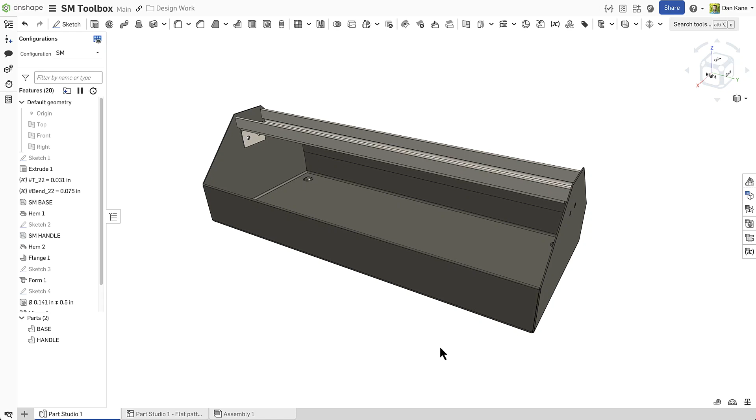This video will provide a step-by-step tutorial for building this sheet metal toolbox within Onshape. We'll cover everything from getting started in Onshape to building your first sketch, all the way through to exporting a flat pattern to be cut for production.

Let's jump right in. The very first part of accessing Onshape is launching a web browser. I personally prefer Google Chrome, but you can use Safari, Firefox, really whatever you want, which means you can run Onshape from any device. So first of all, I'm going to go ahead and launch my web browser here. I'm going to jump over to cad.onshape.com. This is always going to be the best way to go ahead and access Onshape, bookmark it, provide a shortcut. From there, simply enter an email and password, and we're good to go.

We'll start our design by clicking on Create and then creating a brand new document. We'll talk a little bit about documents as we go, but this is essentially your workspace as you're creating your sheet metal toolbox. Go ahead and name it something appropriate and hit Create. We're going to be presented with what should feel like a familiar environment for folks experienced with CAD. If you're not experienced with CAD, that's fine too. But we have our 3 planes and an origin, and we're going to start our design with a 2D sketch.

A few different ways to start a sketch: either go ahead and hit the sketch button in the top left, we can use our shortcut toolbar that's accessed through the S key, or we can use keyboard shortcuts like Shift S. No matter what, we're going to go ahead and create a sketch. We're going to select the front plane, and then we can use the view cube or the N key to go ahead and view normal to this plane. And then we can use the P key to hide the planes and give a clean working environment.

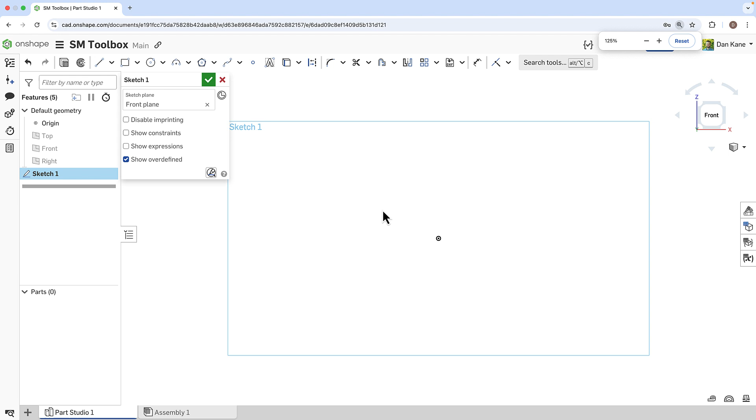We're going to go ahead and provide half of the profile for our toolbox because we're going to take advantage of symmetry and minimize the amount of work we actually have to do. So we're going to start by sketching some lines. So go ahead and access the line command. Let me go ahead and browser zoom a little bit just to make sure that we can see everything as we're working. But we can go ahead and use the line command.

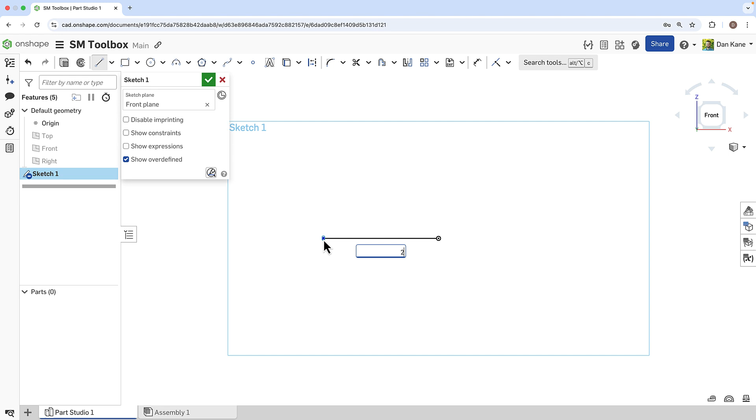And then if we click once on the origin, we're going to be able to drag to select the secondary point. So as we go, if I go ahead and click again, we'll be prompted to enter the dimension of this first line. We're working in inches here. So I'm just going to key in using my keyboard 2.5. And then you'll see I'm still in the line command, so I can keep going. I'm going to snap to vertical here on the second one after I snap to horizontal on the first one. Key in 1.5.

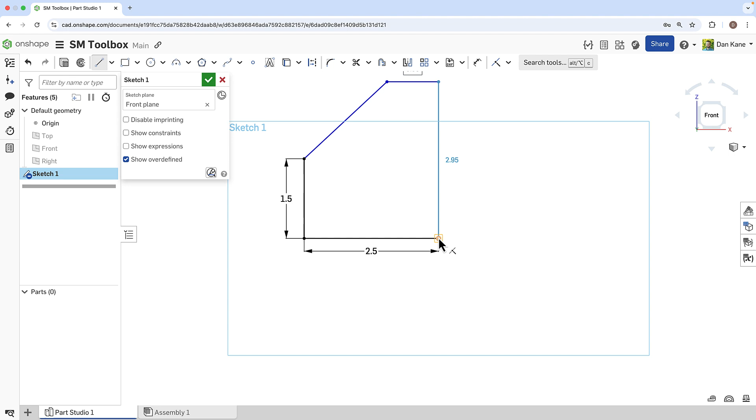We'll then create a diagonal line up and to the right. This one can leave undefined for now, and then we're going to have a horizontal one that actually snaps to just above the origin. Finally, we'll go ahead and drop this down right back to the origin to create this closed profile, and we'll key in one more dimension here. We'll key in 3.5 inches. So we'll see we have a mostly defined sketch, and if I hit Escape, I can actually exit the line command. I could have clicked it again as well.

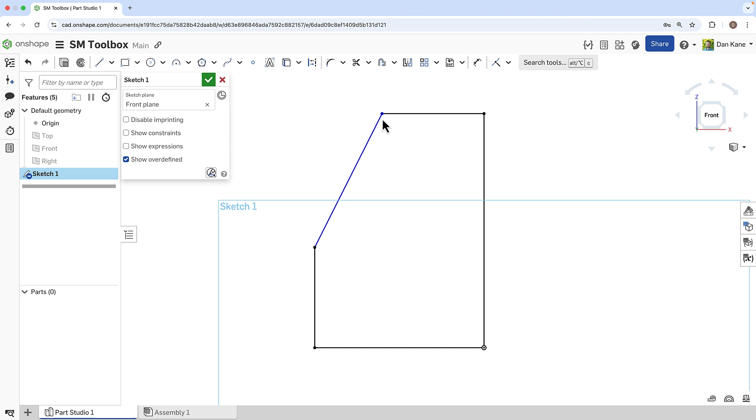But we'll see we have mostly black lines, meaning those are fully defined, with a little bit of blue. The blue means we have an underdefined sketch. We'll see if we actually click on this vertex and drag, this is where the freedom remains. So we're going to go ahead and use our dimension command, or we can use the D key. Click on this vertex here on the top, as well as the vertex on the left. And then we can go ahead and drop this in.

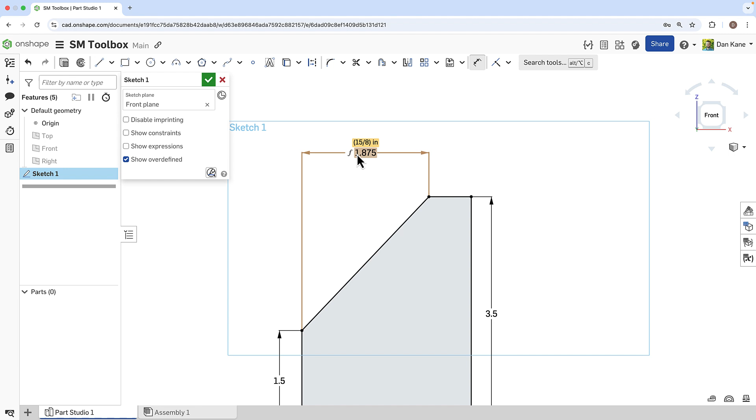We're actually going to have this be a bit of a formula. So we'll key in 15/8. It's going to be 15/8 of an inch. And we'll see that when we drop that one in, this dimension looks a bit different than the others. Right? This one has this F, meaning it's a function. If we hover over, we can actually see what the expression is that defines this dimension. So now we have a fully defined sketch. Great. So if we hit the check mark, we have now created our first feature. We'll see our sketch shows up in our feature tree, and we can go ahead and start to create some 3D geometry.

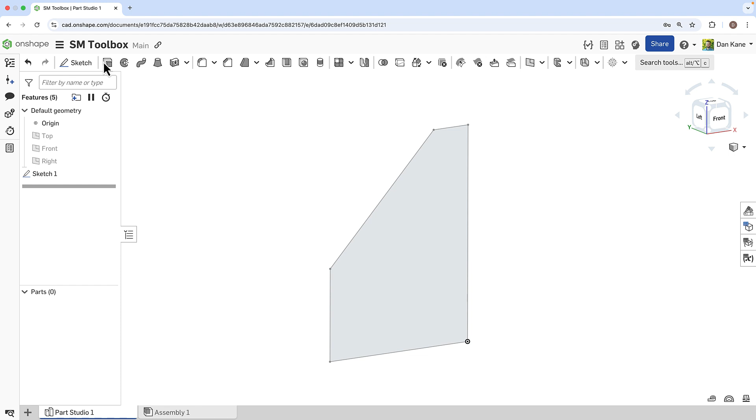So we are going to be working in sheet metal, but you'll find that in Onshape, sometimes the best way to create your sheet metal geometry is by creating a solid part first as the tool to then create the sheet metal. So I'm going to go ahead and use the extrude command. Again, you can use the S key and customize your shortcut toolbar, or utilizing keyboard shortcuts, this will be Shift E. But I'll go ahead and click the actual icon, click on our face, and now we're going to go ahead and key in a depth of 6 inches.

We will again take advantage of symmetry. So we're actually only going to define about half the depth. The total depth of this toolbox is going to be 1 foot, 12 inches, but we'll start with 6 inches and take advantage of symmetry later. So we'll see we now have our second feature. We've extruded this out. We have one part.

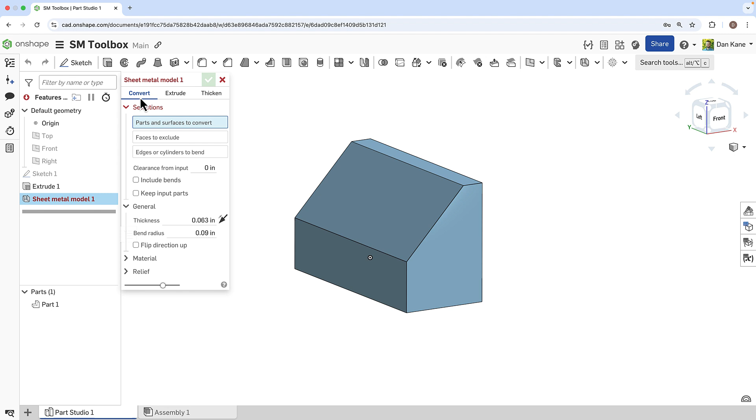And now we're actually going to make some sheet metal. So we're going to go ahead and use the sheet metal command here on the far right of our toolbar. And we're going to use the convert option. This is where when we start with solid geometry, we're then going to convert it over to sheet metal. So if I click on my part, I'll see that every face becomes a separate sheet metal face. In fact, they all become separate parts. We'll touch a little bit on multi-part in just a second, but let's focus on completing this sheet metal command.

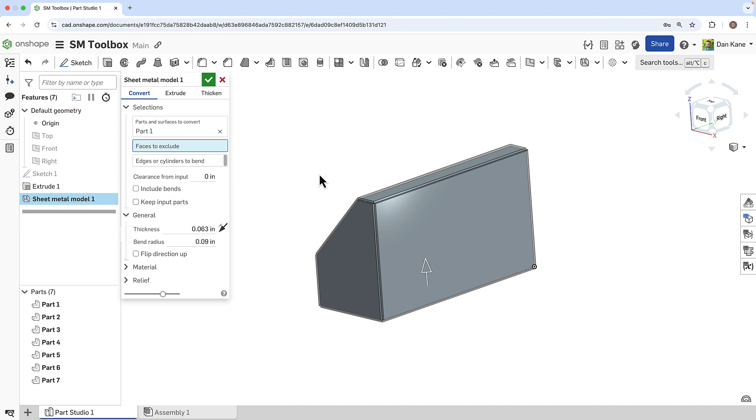Now, we talked about taking advantage of symmetry, so we're actually going to exclude a couple of faces, meaning we don't need them right now. So if I click on this sort of back face as well as the end of my extrude and these two top faces, we now have what is a simpler sheet metal component.

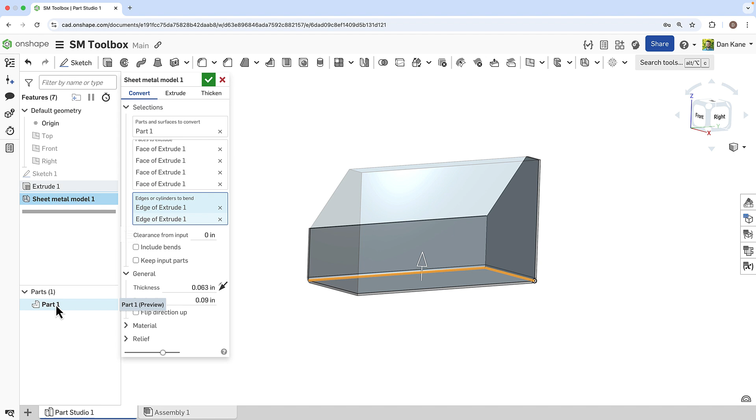And then what I can do is choose where to create my bends. So I will choose these two bottom connecting edges to create my sheet metal bends. And now I can see I actually just have one part because I've excluded some faces and I've connected the remaining faces with these bends along edges. But now we need to go ahead and continue to define the parameters of our sheet metal.

So a few different important things here is the thickness. So thickness and bend radius in sheet metal are often determined by the type of sheet metal you're working with. And there's some predefined best practices, standards around this. So because we're actually going to use a few different sheet metal models here, we're going to define our thickness using a variable. So when I go over the thickness input, if I use the pound symbol, Onshape will prompt me to create a new variable on the fly.

I can go ahead and name this. So what I'm going to do is name it T_22, meaning the thickness of 22 gauge sheet metal. So this is another expression here, and we're going to key in 1/32, and then we'll specify a unit. So we'll say 1/32 inches. That is the thickness of 22 gauge sheet metal. And you can see as soon as I confirm that, we have a new variable feature in our tree just above our sheet metal model that allows us to go ahead and use that on the fly.

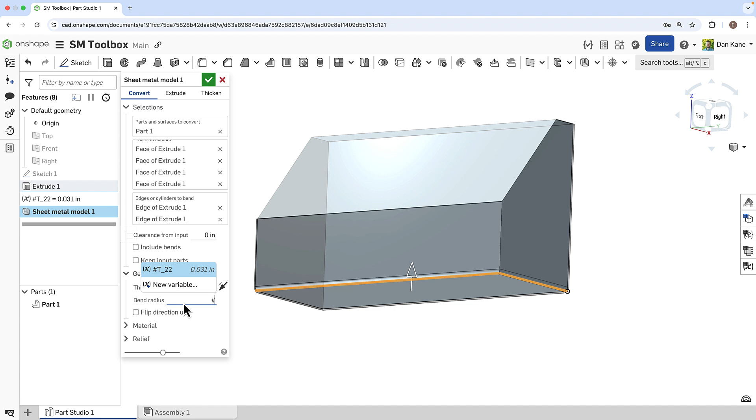Similarly, we'll create a bend_22 new variable. This is 0.075 inches. And now we have these variables that we can reuse later or change along the way and make sure it affects all of the sheet metal within this part studio. Great. So now there's a few other inputs.

We're not going to mess with any of these for this particular design, but Onshape does give you control over K-factor to understand the exact precision of the bend geometry. A couple different ways you can define this with bend allowance and deduction. You can also define your reliefs. These can be corner by corner, but you can also define it on the entire model. In this case, we're going to use a closed corner, but there's a few different options that we can use. And all of this, of course, rolls through to the flat pattern that we'll get to in just a second.

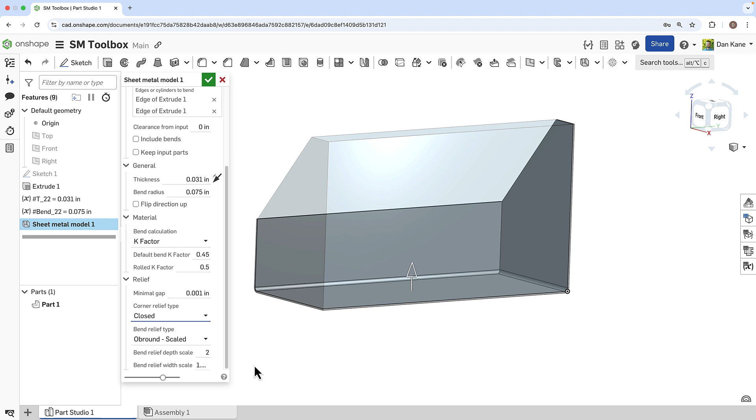So that is the definition of our first sheet metal model. If you go ahead and confirm this, we now have a great starting point to continue to work off of. So this is kind of setting up the overall geometry. And now we want to add just a few different details to this. So what I'm going to do is actually add a hem.

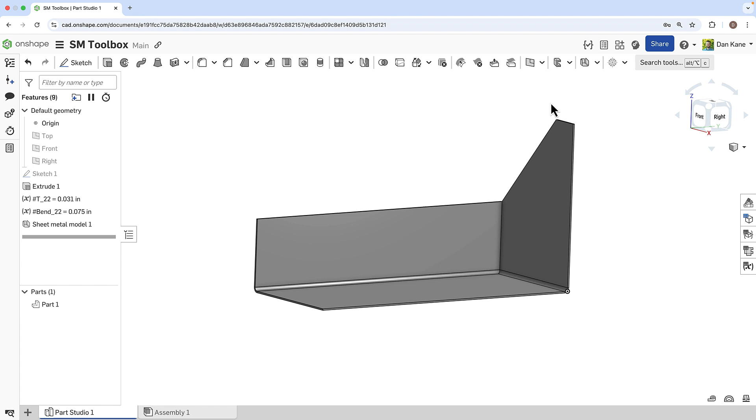So if we hit the drop down of the sheet metal tools, or if we use the search tools, this is a great function to go ahead and find the exact tools that you're looking for. It'll highlight it in the toolbar. We'll give you a quick tool tip. And here we're going to go ahead and select this edge of the side here. So we can go ahead and define this as 1/2 inch, and we'll see our hem get created. We have control over things like rolled hems, teardrop style, but in this case, let's use a straight hem, and we can go ahead and confirm that.

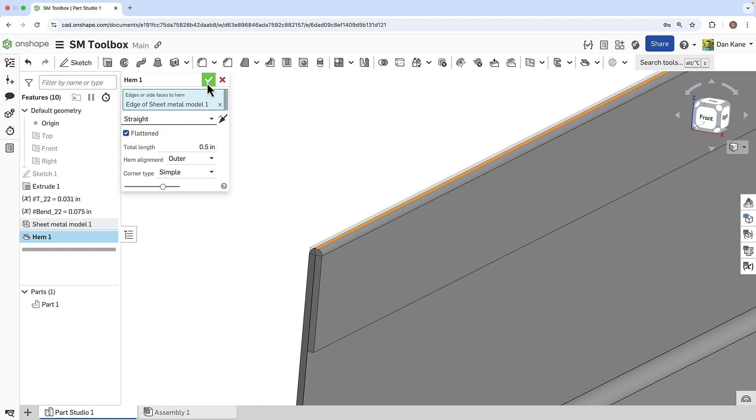Now, the $1 million question I'm sure everybody is asking. What about my flat pattern? In Onshape, there's no flatten and unflatten steps or operations. We are going to be able to do everything in the bent and flattened state simultaneously. The key here is this sheet metal table and flat view flyout on the right-hand side. When we go ahead and click this, we have full insight into the flat pattern while viewing and working on our 3D model. We can go ahead and hover and see the cross highlighting that occurs.

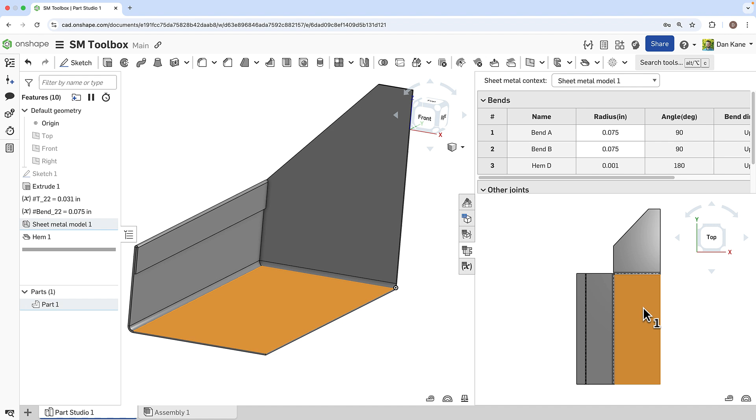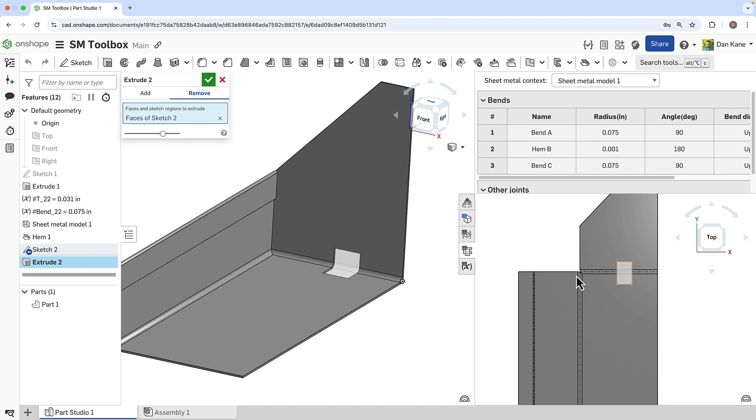We can even sketch on this right-hand side to create parameters that maybe we even cut through a bend. We're going to see all of this in real time. We don't have to flatten and unflatten. We're going to get real-time feedback as to whether or not what we're making in the 3D or flattened space has conflicts in the other one, has manufacturability. All these guardrails and this visibility is going to be available as we're actually designing. Let me go ahead and cancel that. I'm actually going to get rid of my sketch too, just a proof of concept.

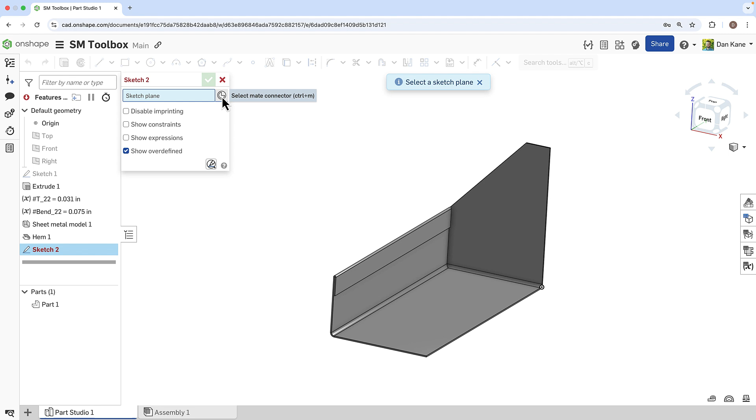Now, the next step is to go ahead and create one more sheet metal component. So what we're going to do is we're going to create another sketch, and we're going to create the handle of our toolbox. So again, sketch, Shift S, we can use our shortcut toolbar, it doesn't matter. But one thing here is instead of picking a plane or a face, which of course we could, we're going to go ahead and use Select Mate Connector as the way to build this sketch. So once I select that, when I hover over the geometry, Onshape Mate Connectors show up at relevant geometric locations.

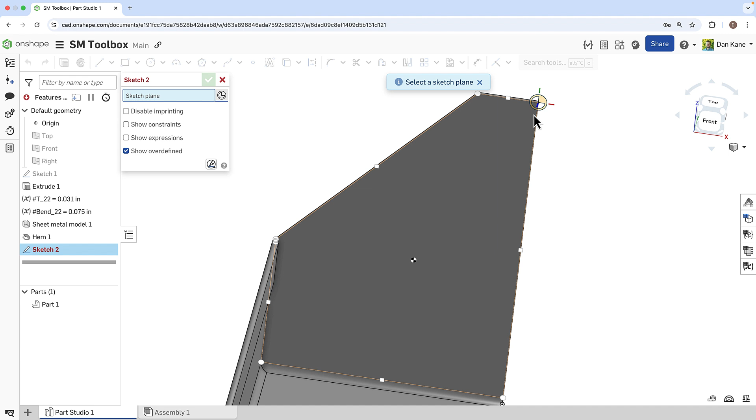There's a lot to Mate Connectors. I highly recommend doing some reading on what we've done here, but this is a Swiss Army knife of a tool in the CAD space. So Mate Connectors are going to be what really drives all of our logic in the assembly and mating space, as the name sort of alludes to, but is a powerful tool in the design environment too, because it provides essentially a mini coordinate system that we have control over. In this case, we're going to use what we call an implicit mate connector, meaning we're using the existing geometry to imply locations to use this. But this is just a great tool to go ahead and use instead of sketching on this face.

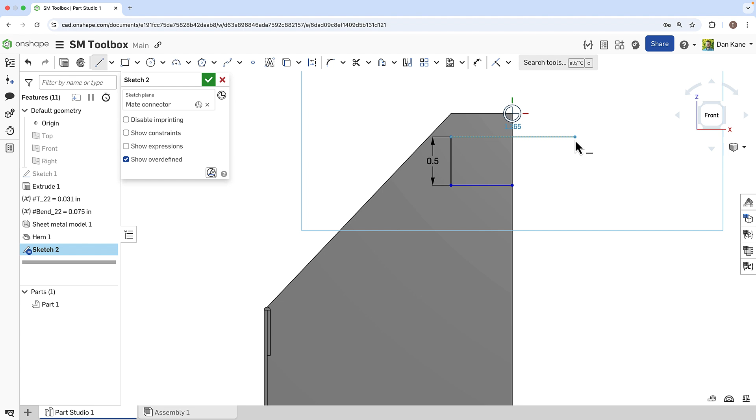I'm going to use my shortcut toolbar using S, and I'm going to go ahead and define just the profile of our handle. So what I can do is go ahead and start on this edge, and then I'm going to snap it horizontal and then vertical to that other vertex. Then go ahead and draw one more line up. I'll key in 1/2 inch. And then it's still blue, right? So I'll escape out of this. I'll use the D key to turn on the dimension command. And I'm going to dimension between these two vertices. We're going to do 1/10 of an inch here, and then our sketch becomes fully defined.

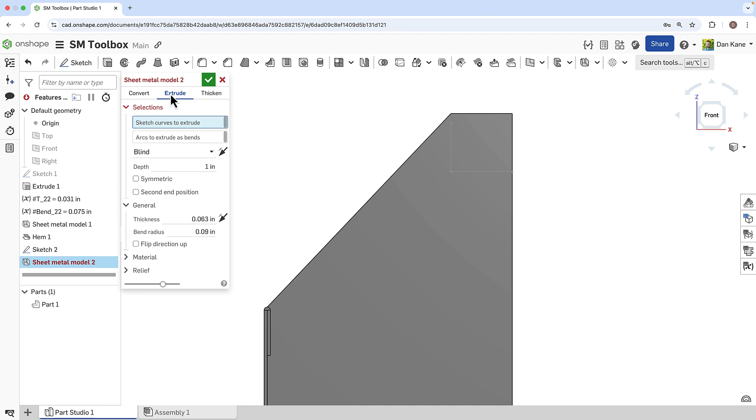Now, we're going to make an additional sheet metal model. But instead, this time of using convert, we're going to use extrude. So there's a few different ways to do this. Convert, we obviously started with a 3D entity. Extrude, we're going to take a 2D profile like I've just created and extrude it out as sheet metal. Thicken is a great option to be able to sketch a 2D profile and then thicken it into sheet metal as a starting point. That may be more familiar for folks who have designed sheet metal in other systems. We provide flexibility, really kind of whatever suits the needs in that moment. In this case, extrude in this profile made the most sense.

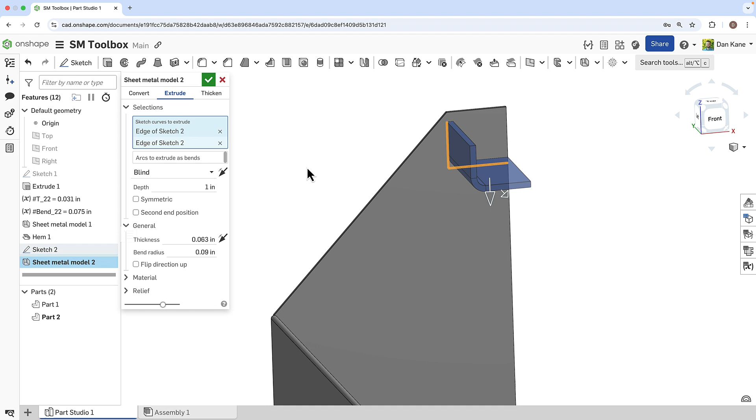We have, of course, parametric controls here. So instead of going blind and defining it, I want to make my model as parametric as possible. So I'm going to go up to face. I'm going to select the end of my existing sheet metal component so that we make sure that this extends up.

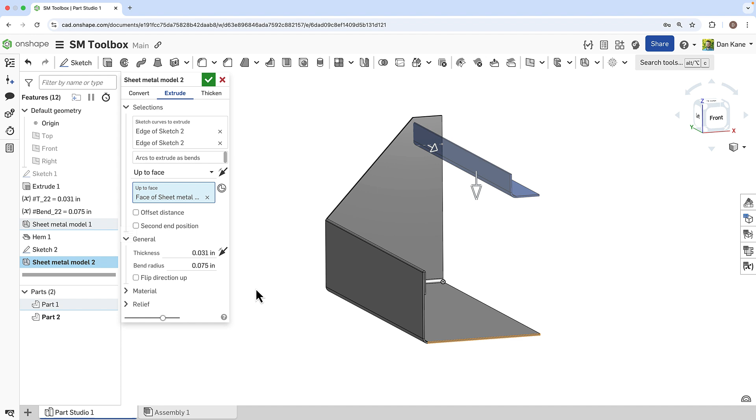We will use those variables that we defined earlier to define our thickness and to define our bend. We can access them just by pressing the pound key and then selecting the appropriate variable. And then I can go ahead and confirm that sheet metal model.

Now, what have we just done? We just built a whole sheet metal part in the context of our other sheet metal components where we needed geometric relationships to define them, right? We defined this profile based on the existing profile of this end of the toolbox, and we defined the length based on the existing length of our toolbox as well. Right, we've just built in robust parametric controls to allow us to adjust parameters and know that both of these parts are going to update in accordance.

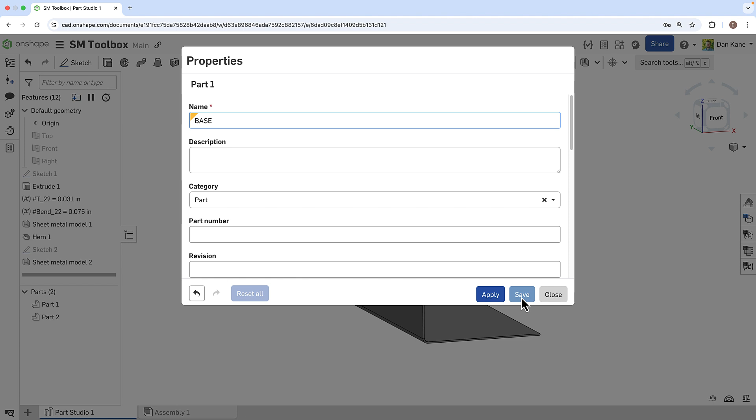Onshape multi-part modeling is very simple and very powerful. These are not bodies, right? I can see I have in my parts list 2 different parts. Let's go ahead and add a name so that we don't lose track of this. So I can right click on this and go to properties. And I'm going to say this one is our base. And then one of my favorite shortcuts is I can select part 2, Shift N, and in line I can go ahead and edit this name. This is the handle.

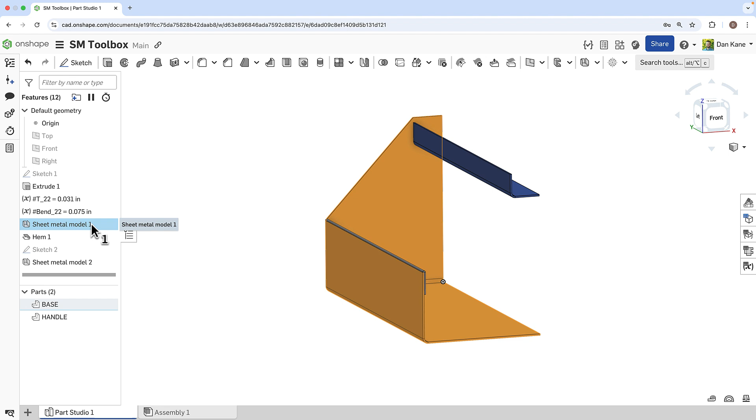Now, it's important to also name our features along the way. So I haven't been doing the best job of that, but I think a few crucial ones too are the actual sheet metal features here. So I can use that same Shift N and say this is SM base. Spacebar deselects. This is a great thing to know in Onshape when we have the persistent selection, you may notice as you go. So spacebar is going to clear that. Shift N again, SM handle, and now it's a bit clear.

And it's really important, particularly on sheet metal, to name these because as we go back to our flat pattern view, we actually have multiple flat patterns within this same part studio. Right, I have my sheet metal base, and you can see that up here, but then I can switch and see my sheet metal handle. We're going to manage both flat patterns in this same part studio, just like we're managing both parts. And of course, everything's going to update in real time and be parametric together.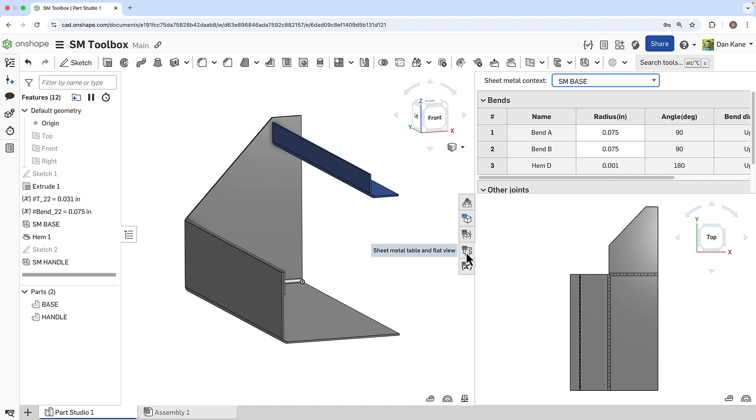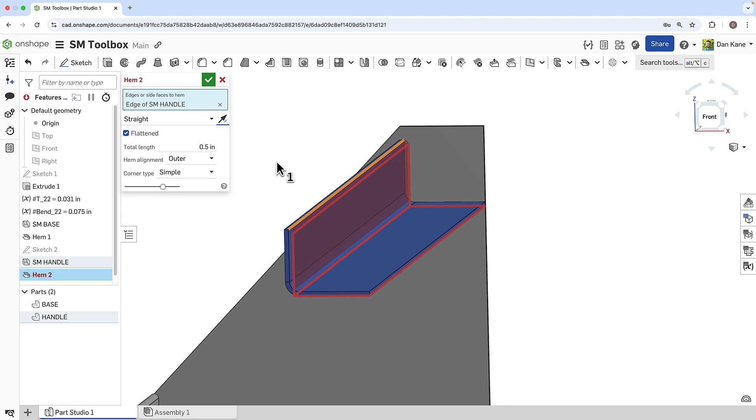Now, let's add a few more details to this handle. So we're going to add one more hem along this top line. By default, it goes along the outside. We actually want that along the inside of the model. So I'm going to go ahead and flip it in the opposite direction. And then we see in real time that we have a collision. Onshape is going to alert us to this. If we were doing this in the flat, we may not see that. But we're going to go ahead and change this then to 3/8 of an inch and remove that collision.

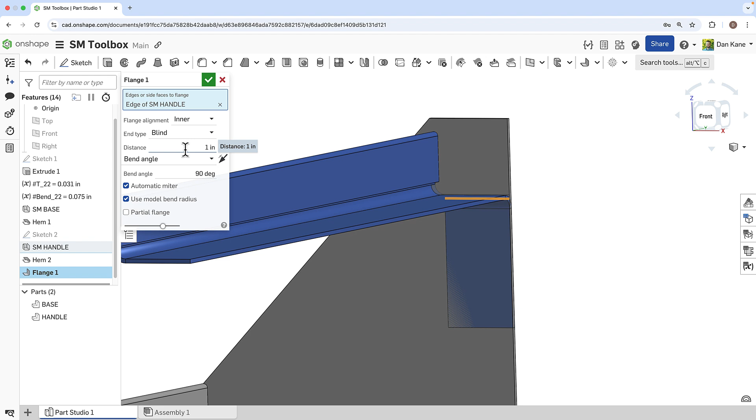The other thing we're going to do to the handle is add a flange. So in the same sheet metal drop down with all of our sheet metal tools, we're going to add a flange. So we'll select the underside here, and Onshape is going to go ahead and create that geometry. We're going to make this 3/4 of an inch. And if we zoom in though, we see another issue, right? We see these are actually overlapping with the other sheet metal geometry.

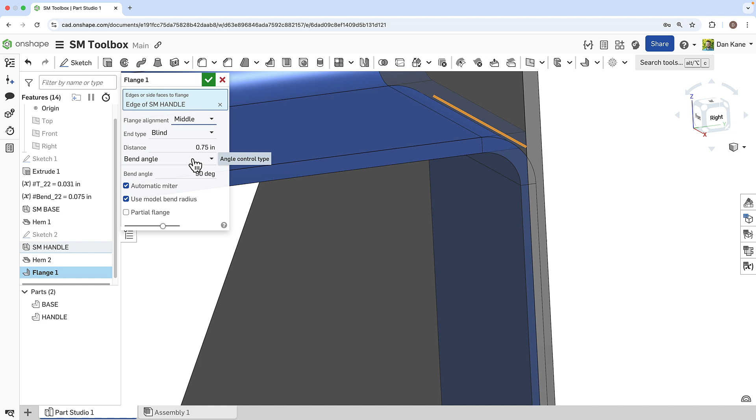So what I'm going to do is actually define the flange alignment. So what this does is control exactly where this bend occurs and where the flange ends up based on the existing geometry. So inner, we have that full overlap. If I go to outer, we find that they line up in the way that we expected. Middle, of course, goes right in between. In this case, we want outer for this flange.

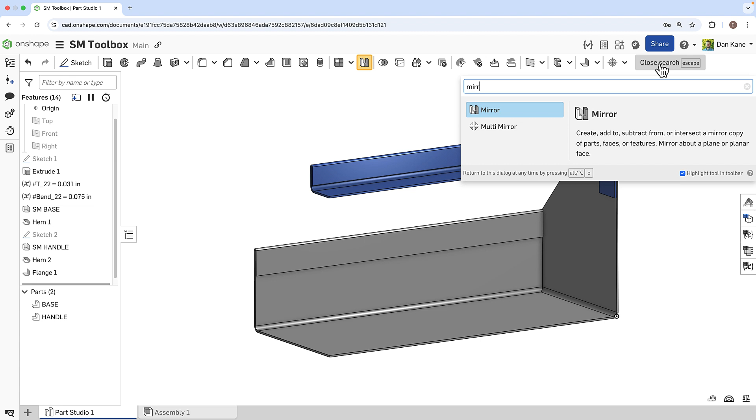Great. Now, we are at a point where we can take advantage of symmetry and really round out our preliminary design of this toolbox. So what I'm going to do is use the mirror command. This might be something that you put on your handy toolbar. I don't have it on mine right now. Search tools as well. If you can't find the mirror command, just search for it. It'll highlight in the toolbar, or you can select it right from here.

In this case, we actually select both parts to mirror. And it doesn't really matter which plane we mirror over first. I'll use the right plane essentially. An important thing to know here, every Onshape feature, because we are in a multi-part environment, you have the option to create new parts or add to existing parts.

Right now we're actually creating two additional parts, which isn't what we want to do. We want to add. But there are also other tools embedded here: a mirror cut, a remove, an intersect, all embedded within this tool. So everything from extrudes to revolves to lofts, all of these add, remove, intersect, new commands are always at your fingertips. Don't go looking for an extrude cut or a boss cut, that's all embedded within a single tool.

Another place we're going to see mate connectors show up is right here. Instead of selecting a plane, we could use a mate connector. These are everywhere, and I'd highly recommend checking those out.

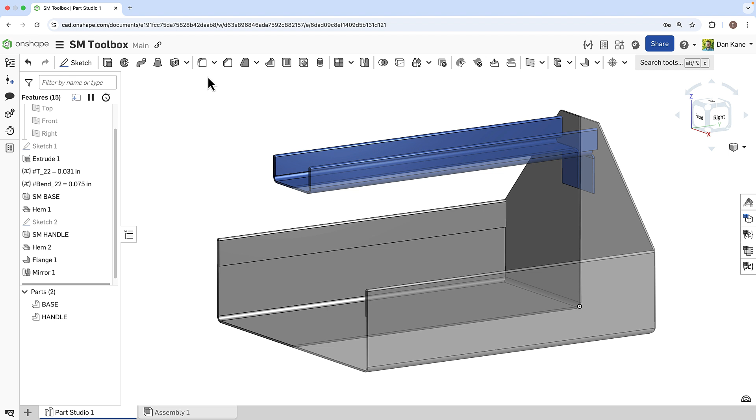We'll go ahead and confirm that. Go ahead and make one more mirror. Select both parts again, select this front plane now, do an add, and now we've taken advantage of symmetry and very quickly created what looks like a great toolbox. Flat patterns are going to be fully updated as well.

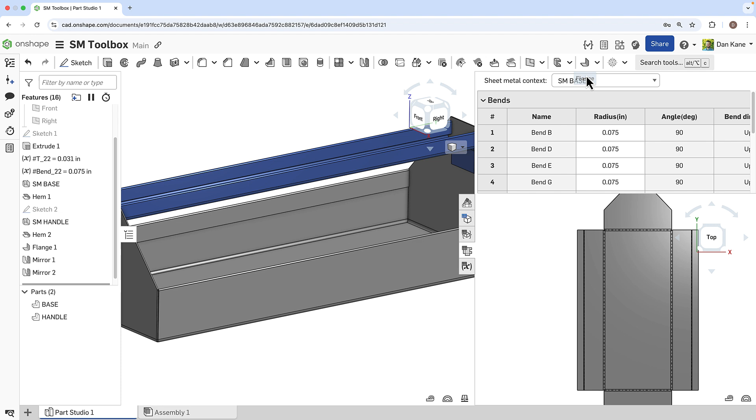Now, good job on the modeling. But you may have noticed along the way, or if you're familiar with other CAD systems, you may be looking for the save button. That was actually a good amount of work to do without ever saving. Maybe that wasn't great practice. Well, in Onshape, yes it was, right? There is no save button anywhere within Onshape.

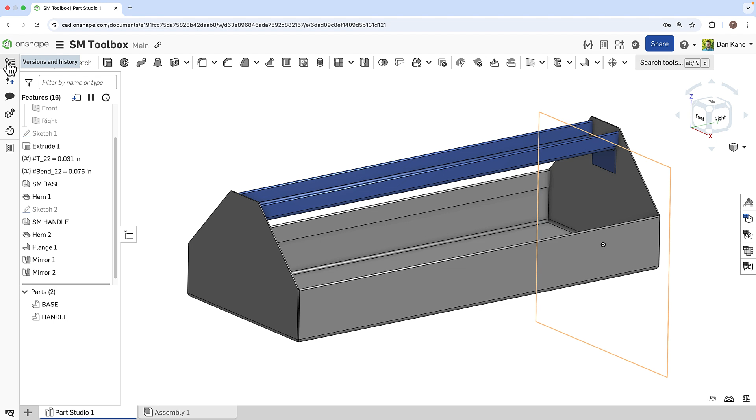All of the work we've done is completely tracked, recorded, and preserved for us. So the key to all of this is a very important flyout called the versions and history graph here in the top left. When I select the versions and history, I can expand the changes and see every change I've made to my design since the very first thing I did. I can see I started my model and then inserted sketch 1. Everything along the way is captured. When I added that sketch in the flat pattern and then deleted it, those are line items within here. All of this is totally accessible, retrievable, and happening automatically.

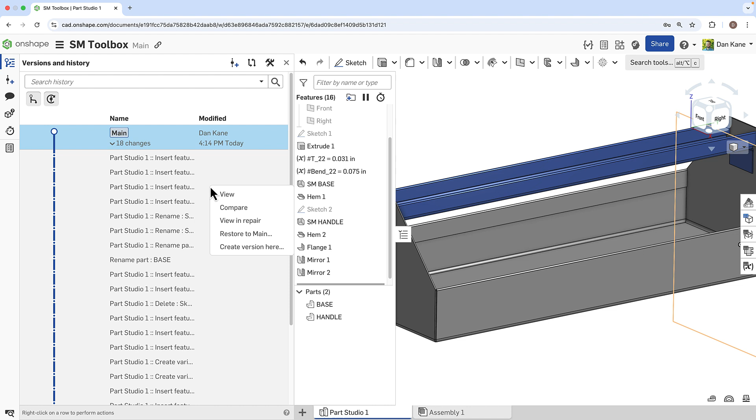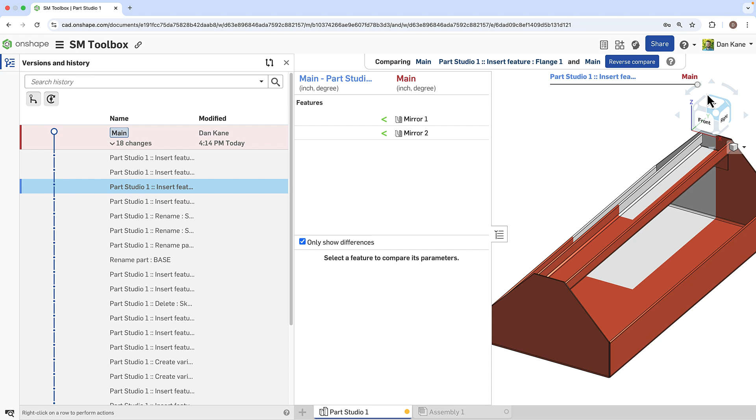For example, let's go ahead and go back. If I want to come back a few features ago, maybe right before these two mirrors, I can go ahead and view that previous point in time. I can compare to the way my design looks currently. I did that quickly, but that was a right-click compare, and here I can see what features have been added or removed or changed between one time and another. I can visually drag between one point in time and the other to see where the changes are, and what I can do is actually jump back to any previous point in time.

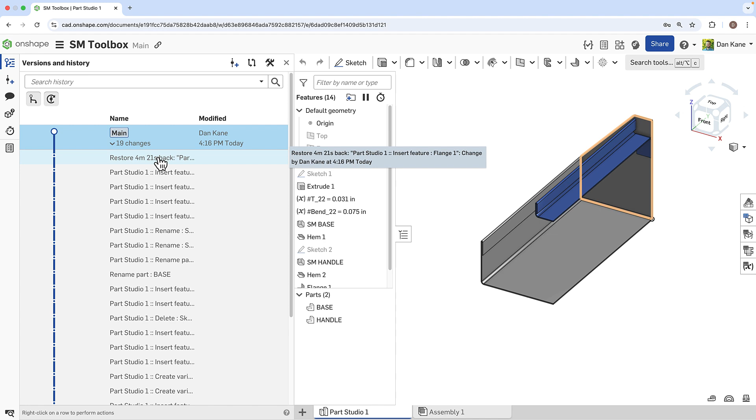Or if I want to jump back and restore prior to those mirrors that I added, I can right-click, restore, and be able to actually jump back in time to that previous point. That restore is simply a line item in here. I didn't overwrite any changes when I did that. So what I also have the ability to do is come back and restore before that and essentially undo my undo.

So just to pause for a moment and think about what that means: you will never lose data due to a crash, you will never lose data due to a mistake, and you can never get to a point so broken that you can't go back to a time that worked. All of this is captured automatically, fully retrievable.

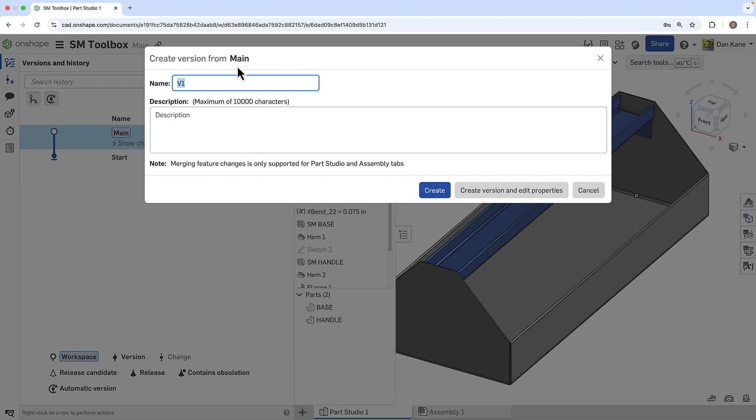Now what I'm going to do is actually make a version, though, that creates a pivotal point in time that will stand out among the other changes. Every single change there may be hard to find at any particular point in time, but I'm going to say initial design has been completed, and mark that with a version that stands out, uneditable, undeletable, always easy to access as a prior point.

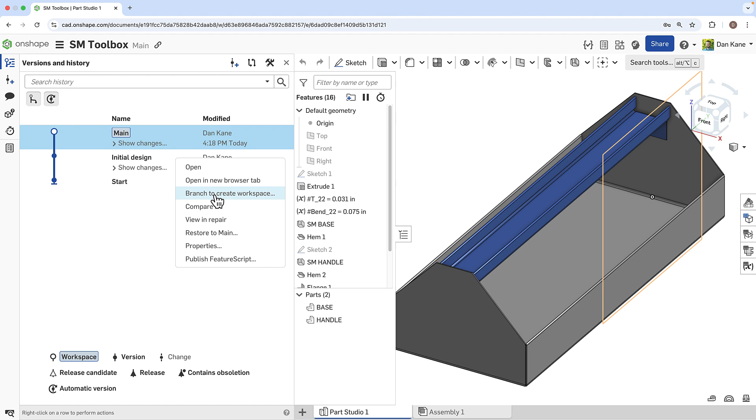From there, I actually want to make a few investigative changes. So what I have the ability to do is try things out in a completely separate workspace by creating what's called a branch. So instead of save as, instead of a pack and go, I have the ability to right-click branch, and in here I want to try some things out related to forms. I'm going to say forms testing up in this branch. And what you'll find is the work done in this branch is completely isolated.

So if I go ahead and go to the base and edit the appearance, and I make this maybe more of a rustic color, I go to the handle and do something similar.

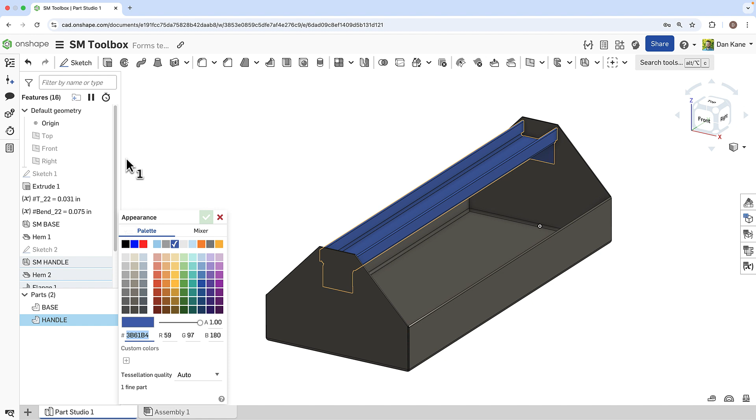This is not reflected back over in the main workspace, right? So we have a space to test, a space to try things without affecting maybe what other people are looking at in the main space.

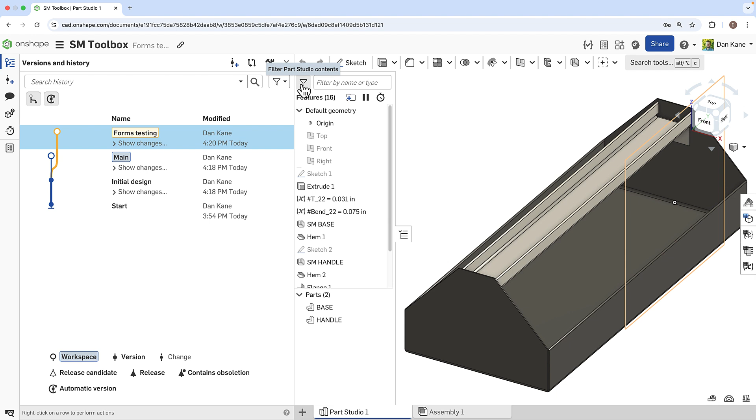But let's keep working, let's keep designing. We actually want to do something before the mirrors. So like any good parametric CAD system, I have the ability to roll back right before I mirrored. We're going to do two things in this branch: create some form features and drill some holes.

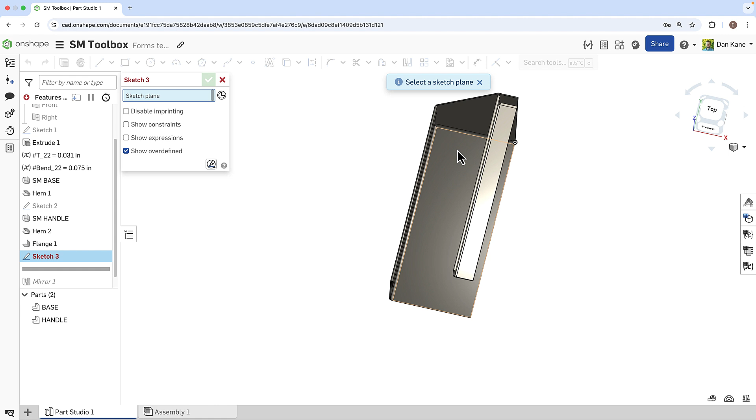So we're going to make one more sketch, and this time we'll just do it on this bottom face. The N key brings me normal, and I'll zoom in a little bit. We're going to create some construction geometry to create a location for our forms.

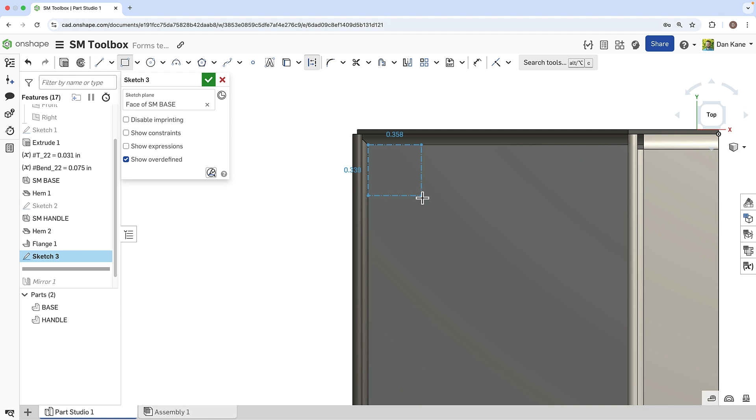I'm going to use a corner rectangle command, and I'm going to put it into construction mode. This can be the shortcut key Q, or just click this button, start at the corner. We can drag out. Then I'm going to apply a couple constraints. I'm going to apply an equal constraint where I can either use the shortcut E or use this button, and make this a square.

And then I'm going to apply one dimension to it. So I'm going to go ahead and say this is a 1/2 inch. Because it was equal, that's going to apply to both sides. And now this becomes fully defined.

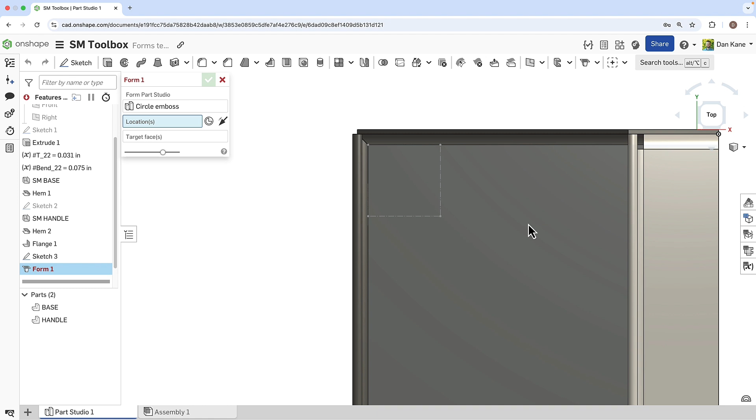Now, we're essentially trying to add some vibration reducing form features to the base of our sheet metal. So if I come into the sheet metal dropdown, I can find the form command. I'm going to go ahead and select this vertex.

And then I'm going to find the circle emboss within the built-in form feature library. Onshape has a wide variety of built-in forms, but also allows you to customize your own form library with plenty of documentation and training on how to do that.

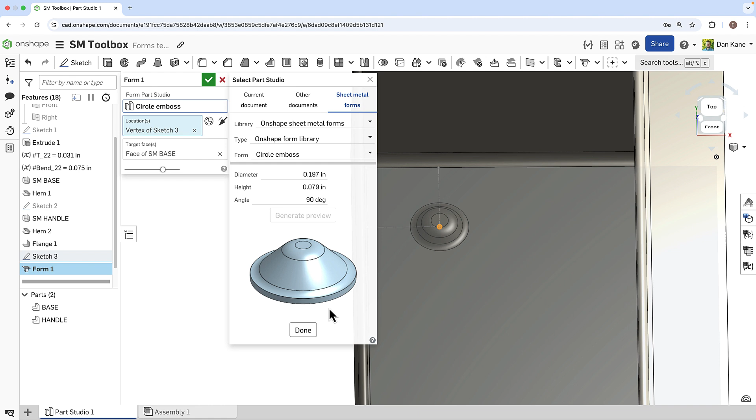So in this case, we want to find the circle emboss, and we want to use a diameter of 5 millimeters, height of 2 millimeters, and an angle of 90 degrees. Go ahead and hit done, and now we have our form feature. Go ahead and hit confirm, and we'll find that that, of course, mirrors across once we're done.

We have one more thing to do. I want to go ahead and sketch one more time. We're going to make a location to drill a hole to mount our handle.

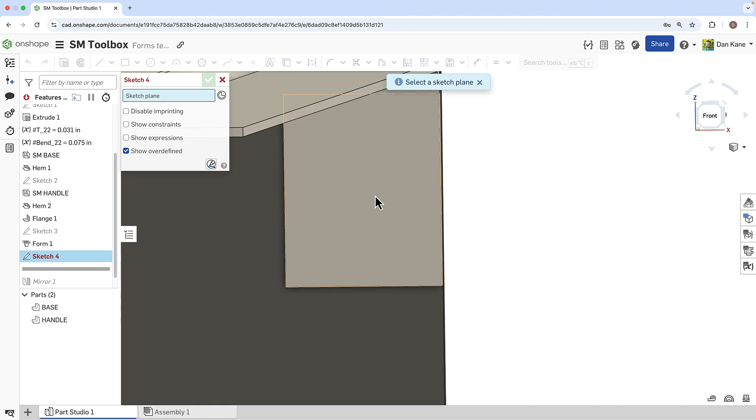So if I go ahead and select this face as my sketch plane, I can again use some construction geometry, this time a line, but I'm going to hit Q to make it construction. You can see that turned on. Find the midpoint here, should auto snap to it.

And then we'll find our midpoint on the right and drag over until we're vertical and horizontal. Find that center point right there.

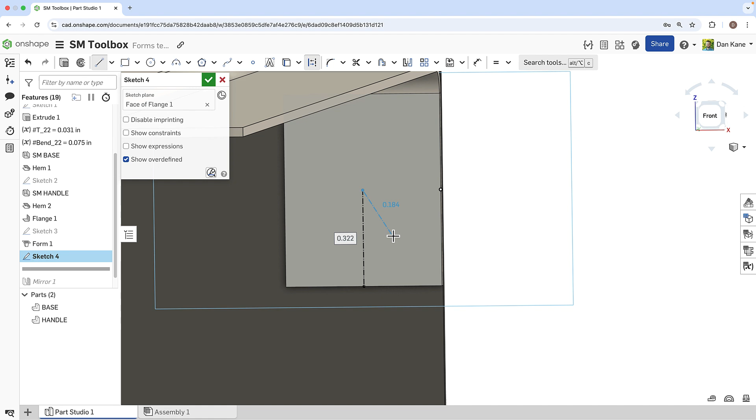From there, we'll use our hole command. And we'll select this one point. And in this multi-part environment, we're going to find this hole actually goes through both parts.

We can create features that affect multiple parts in one. So we can see our merge scope here is base and handle. If we don't want to affect the base, we can simply remove it from the merge scope and just drill through the handle. But we do want it through both.

We want to create a mounting hole here, so we're going to go through both. We'll use a drilled hole, 9/64ths, and we can go ahead and confirm that.

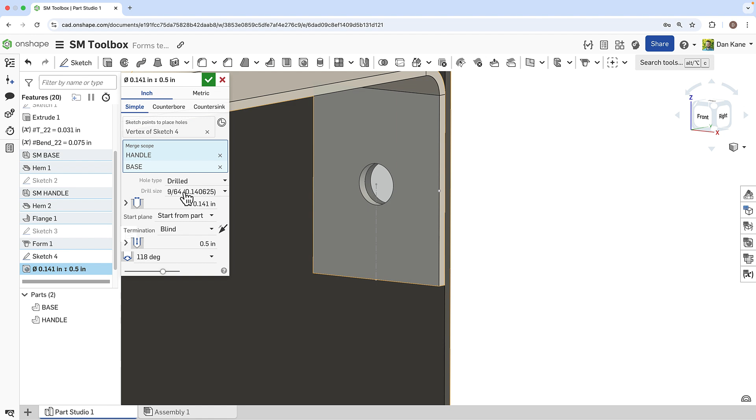Awesome. Now, let's go back and we can right-click roll to end. And we'll see that our form features, as well as our holes, have mirrored appropriately, and we got a pretty good looking toolbox coming together.

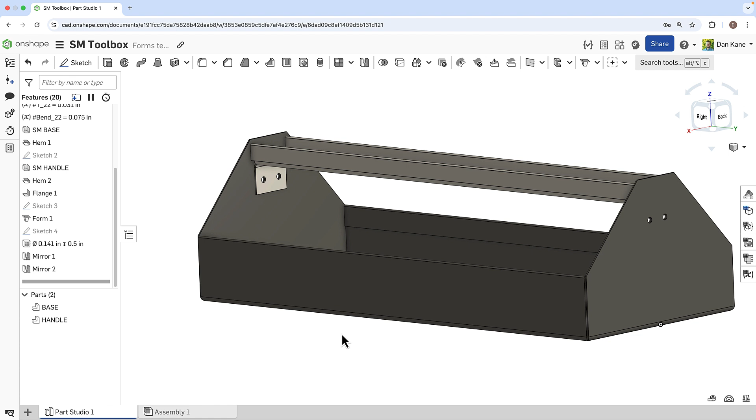Now, remember, we're in a branch. We're actually testing things out here. So I'll again use this compare, and we can actually do this across branches. So if I'm on one and I right-click on the other, I can go ahead and compare again.

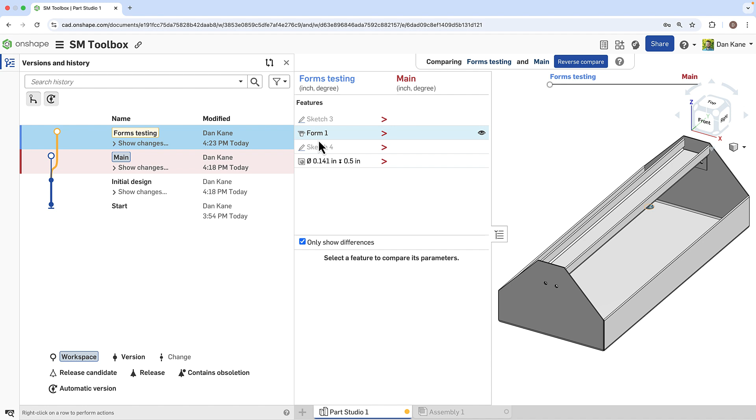In this case, it might be a bit more interesting than that last one, which was pretty obvious. But in this case, I can see the features, the components that have changed. You can see the visual highlighting that occurs. And I can go ahead and drag from one to the other as well to be able to understand that difference.

Now, if we go back into main, I want to make some changes here. This can be happening in parallel, and that's the beauty of this whole environment. You can try things out, have multiple teammates working together, trying out some parallel ideation.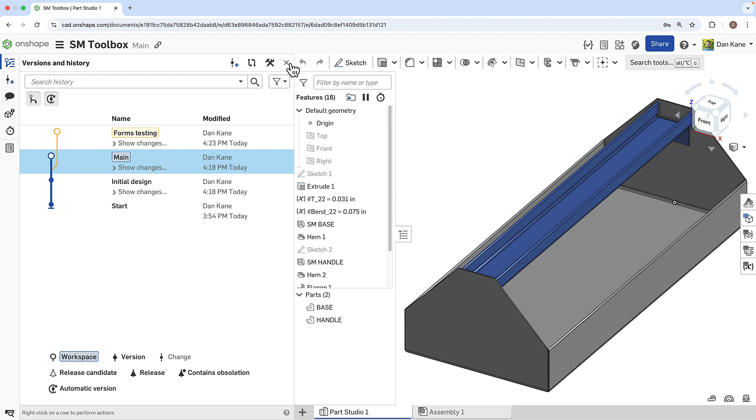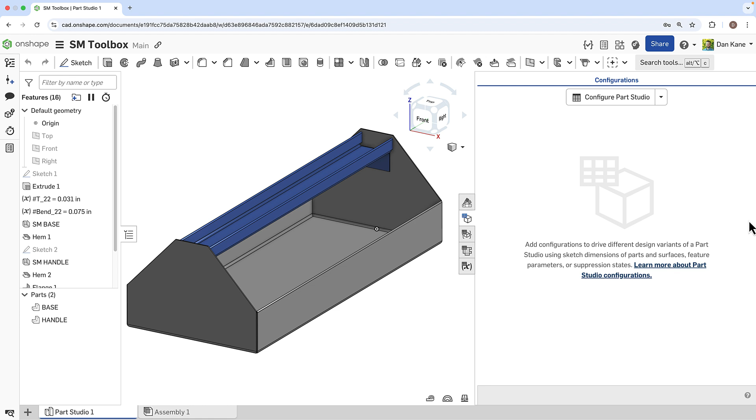What I want to do in this main branch, very quickly and easily, is configure my toolbox. This is a type of product that may come in multiple sizes with shared underlying design themes—it may look similar, but we're just going to modify some sizing. We can do this in about 60 seconds. We'll open the configuration panel and choose to configure our part studio. This can be very straightforward. We'll type in maybe small and large, and then choose what features, what parameters get configured with this.

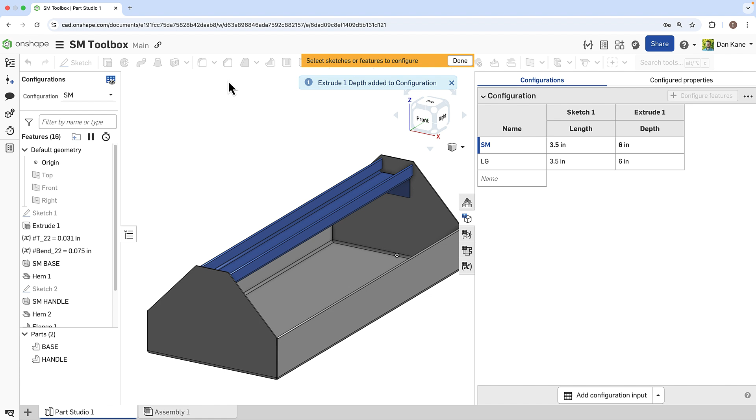I'm going to click into sketch 1, and we're going to control the height—we'll add that 3.5. We're also going to control the depth of this first extrude. The one we designed first was our small size. Now we're going to make our large size—maybe that's 5 inches tall and a total of 8 inches long.

Let's take a look up here on the top left. We can access all of our configurations. Let's look at our large one. That maybe looks a bit weird. Maybe we didn't just need to control that total height parameter, but we actually need to access other parts of that sketch to make sure these walls aren't too low for that height.

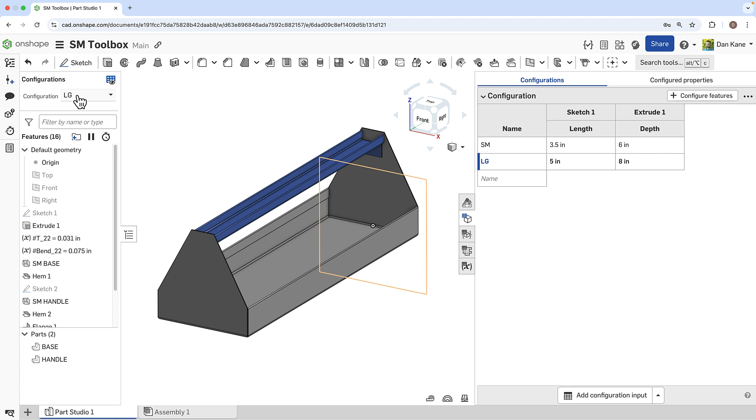So very simple—we go back, configure features, access into sketch 1, and we'll select this 1.5. And then maybe this one needs to be 3 for our tall one. Yeah, that looks a bit better. Just like that, we've configured our sheet metal.

We have multiple sizes. There's a lot we can do here—you can have checkboxes, maybe with or without the forms, there's variable inputs. There's a lot we can do with configurations, and you can have separate individual configuration inputs.

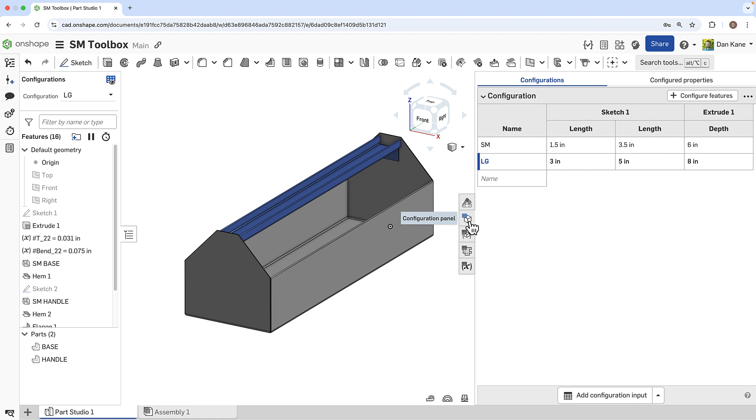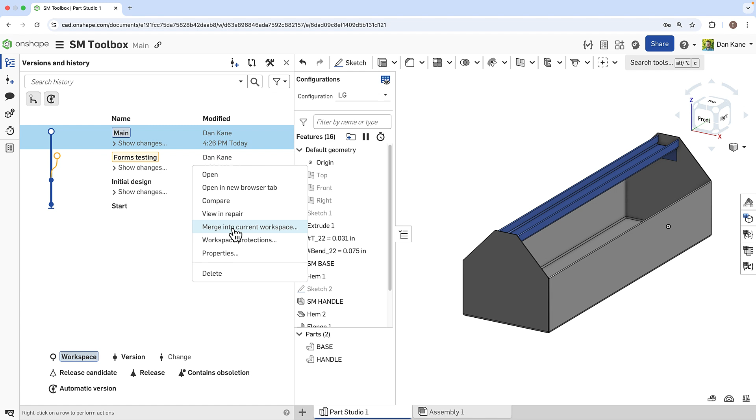Now, getting toward the end, we have worked in multiple branches. We have created forms. We have done a lot, and in fact we've done multiple things in these branches in parallel. Only Onshape has the ability to take this testing branch and actually merge and combine changes from multiple work streams. There are changes in main—main's been edited. There are changes in forms testing—that's been edited. I could choose to just replace or keep. Honestly, that's kind of what other systems do—they totally overwrite. Onshape allows you to take changes from both and merge this together.

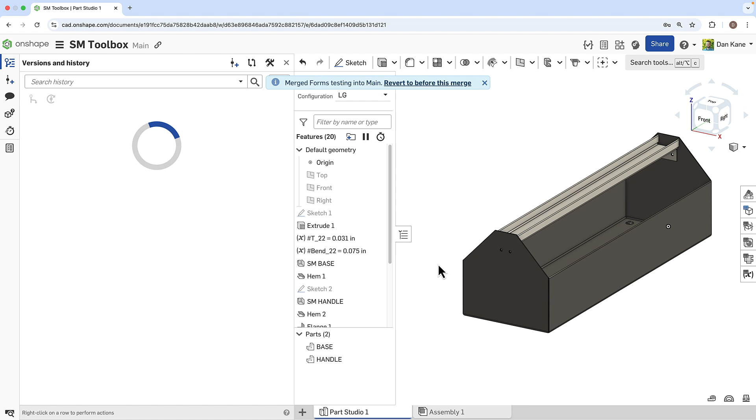So we are now back in main and we have our configurations. But we also have these forms and these holes that will allow us to assemble these components properly, adding a bit of vibration reduction. We have now worked in parallel work streams and combined that work.

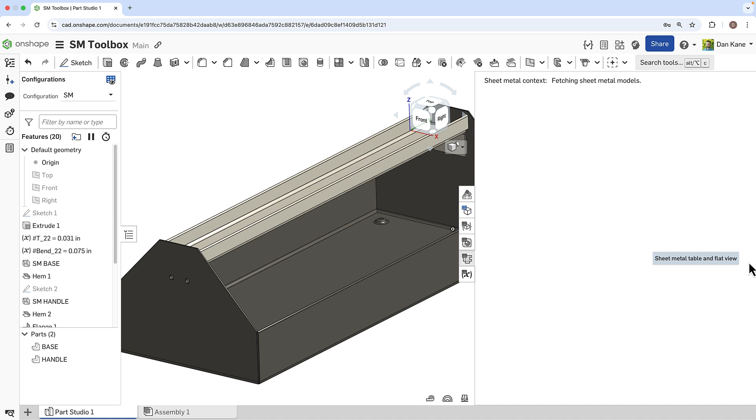Final step here—there's other things we can do with drawings and assemblies. For the sake of this video, I want to go ahead and export the flat pattern for our base to show that, because that is the important product of this design work. The design doesn't necessarily matter—we want to help you manufacture physical things, which means we can go ahead and right click on our flat pattern, export our DXF, and choose our settings related to this.

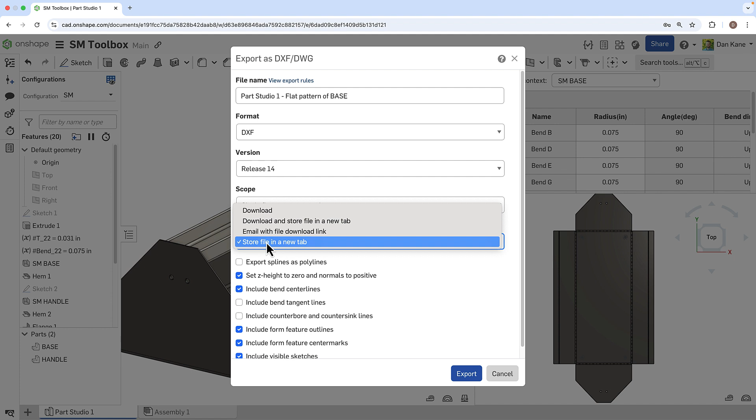We can export both flat patterns or just one. We can download it or even email it to somebody directly from here. I want to store this in a new tab just to show what it looks like. A lot we can do here to control how form features come out, how bend center lines look. But let's go ahead and export this flat pattern.

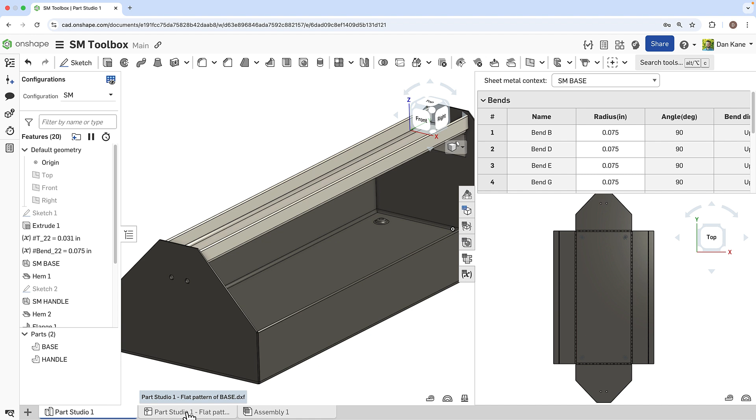Let's go ahead and view it right within Onshape. We have another tab that was just created in our document—Onshape documents contain all types of different data. Let's click in, and now we have our flat pattern for our base. We are ready to send this and get it cut. We can see our form features and control our layers—hide and show things like cut lines, form lines, bend up, bend down, have control over all of that.

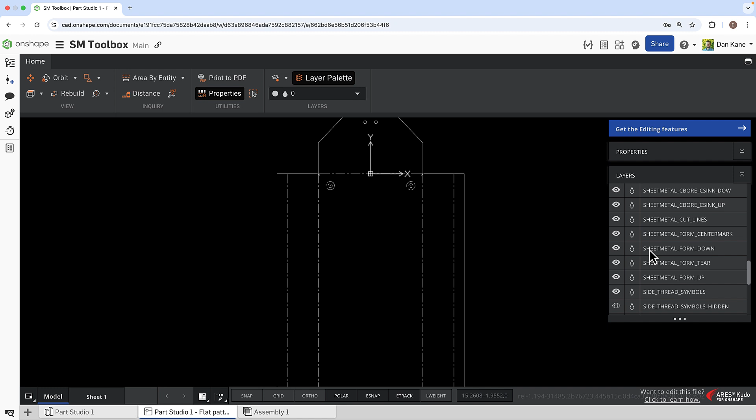Remember, we have been in a web browser this entire time—there are no downloads or installs for Onshape. We can share this document, send someone a link. In fact, I'll put the link to this document in the description of this video.